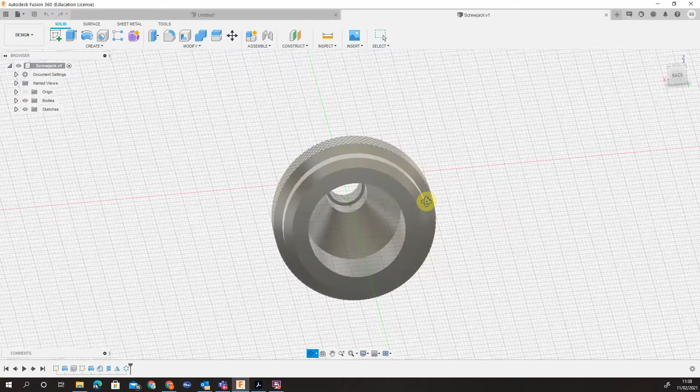Hello everyone, this is a tutorial on how to make a Screwjack body as part of our Screwjack assembly. This tutorial will show you how to use the Revolve command and look at different features we can include, such as internal features, threads, and how to create a nice diamond knurl, which you would have physically for 3D printing or physical rendering effect. So let's get to it.

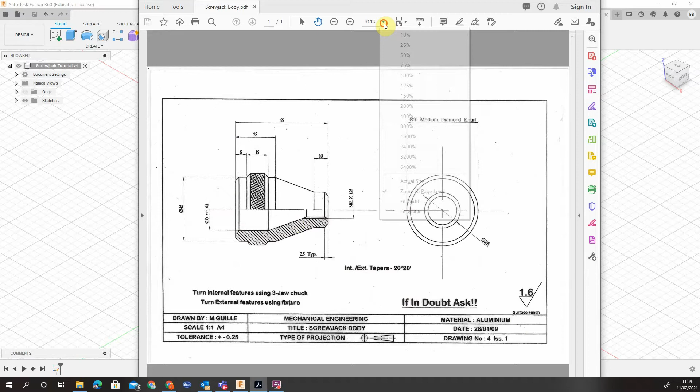A couple of features to point out: it's 50 mil in diameter externally, 65 mil long, and it also has a 30 mil internal diameter with tapers that are 20 degrees. So let's zoom into this particular part here.

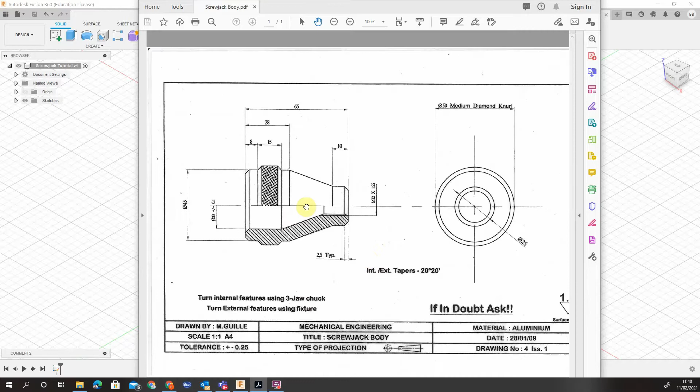This particular drawing is very much different. This half above is what we class as the external view, and this half below is the internal view. So essentially you can see the external features and the internal features on the same element of the drawing - it's a half split drawing. A medium knurl is indicated on the external edge as well.

So let's start making our screwjack. I'm within the workspace - all I've done is save at this point. Obviously I need to draw within my Fusion, so as I said, we're going to use the Revolve tool to do this. Essentially we're going to draw half of our profile and revolve it around a center axis.

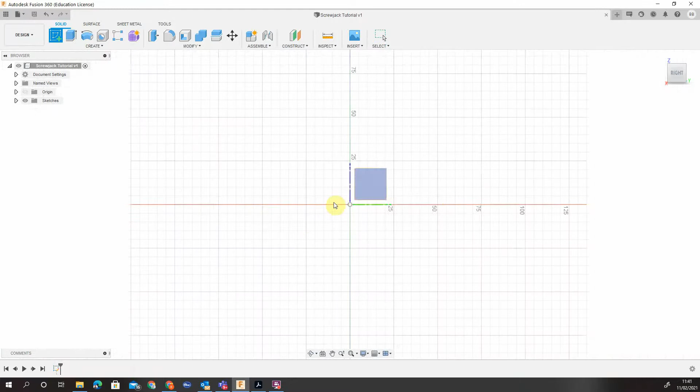To make this nice and straightforward, I want the front of my piece to be on the front here, looking at this section, and I want this to be the left-hand edge as well. So for top, front, right, we're going to draw on our right plane to make it straightforward. Since it's only 65 long and 50 high, let's get a nice view here so you can see your image clearly.

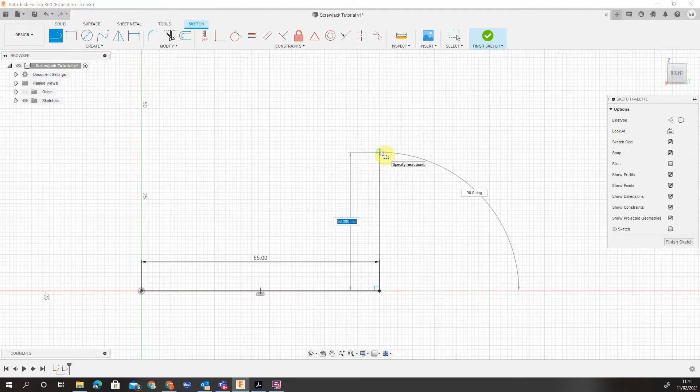First off, I'm going to draw my line 65 mil, and I know it's got to be 50 high. Since we're only going to revolve this around the center point, I need to draw half of the axis, so it's going to be 25 high - just to stay in that perspective and get a nice clear starting point.

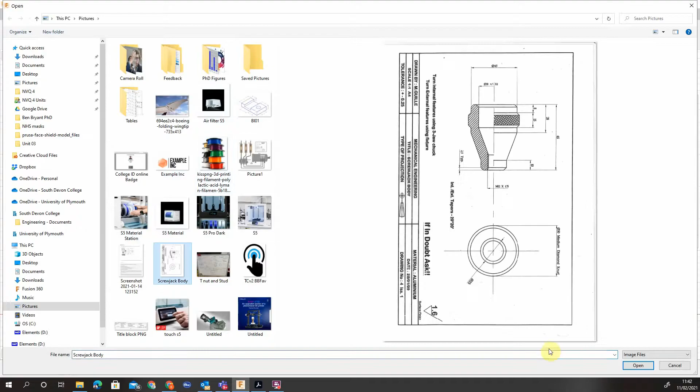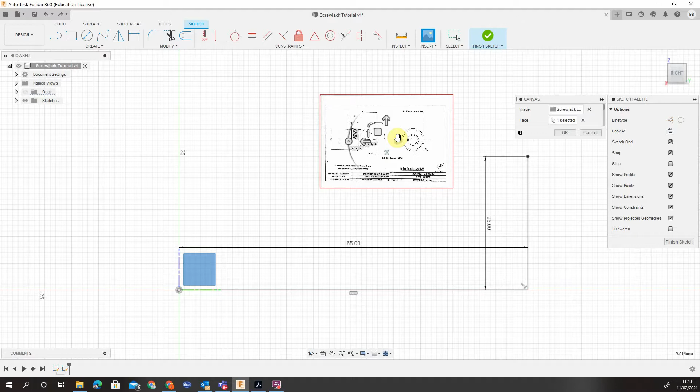Okay, I'm just going to insert my canvas - this will stop me from moving screens the whole time. Manipulate, move that, go slightly above. From here I just need to rotate it around. Hopefully a bit bigger, just so I can see it as a kind of shape. I'm going to zoom out a bit, move everything over, pop this about there, because that's going to be the length I'm looking at.

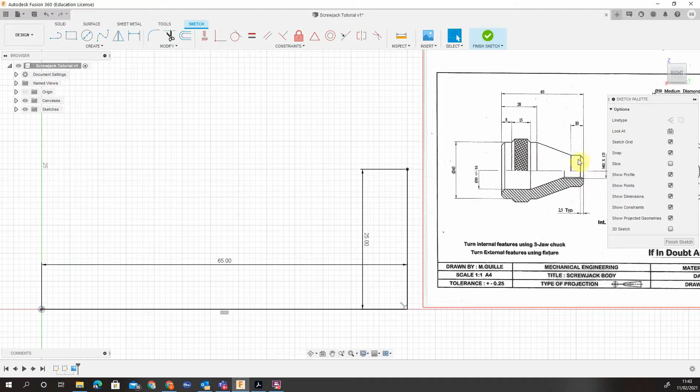Okay, so what we're going to do is we can see our features here: 65 long, 45 high, 50 on the external limit, and then we've got our features. We're going to put this 10 mil this side here, so we know this feature here is 25 - just move that one, it's demonstrated just down here.

25 there. First of all, I'm going to start with this bottom left-hand edge, so 12.5 high, and then we're coming in 10 mil. That's all I can do on that side because I don't know this length yet. Next, I'm just going to tweak this to actually 22.5 - that'll be my starting edge at 45 degrees. I need to come in 8.

And then come up using the L hotkey, coming up further 2.5. Hotkey again L, coming out further 15. L coming again, down about 2.5, coming out a distance, which I don't know yet.

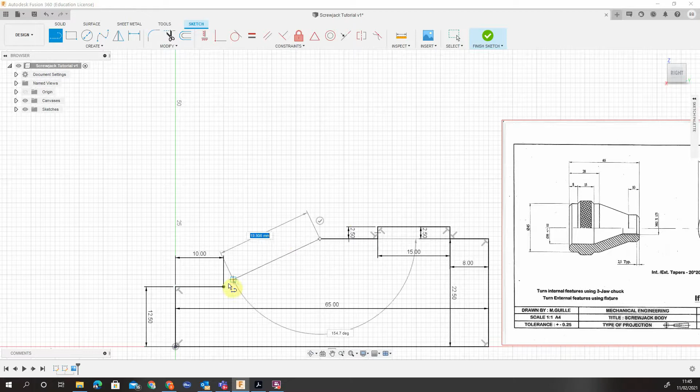And then hopefully going to drop down the angle to get the angle correct. We're going to do the angle in a second. So I'm just going to exit that one. I'm going to run my measurements. I know it's 28 from there to there. So 28, getting everything nice and linked up.

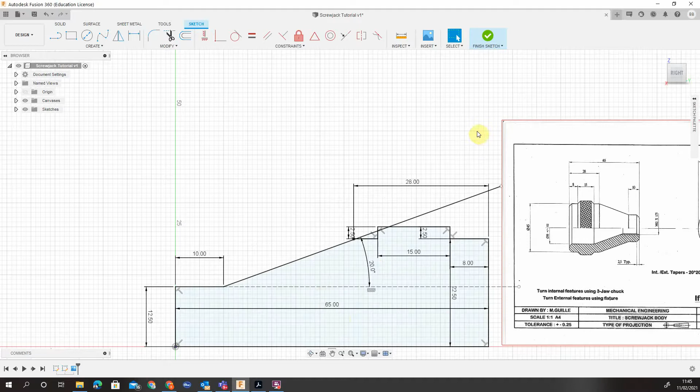Now what I'm going to do is do a tangent line run off of my 10. I know it's 20 degrees. Enter, that's obviously matched the 2. I'm just going to trim

out these components here, get my feature. So that's basically my feature there. I come and just check a couple of dimensions, make sure everything is okay.

So I'm just going to remove the 2.5 here and here because we don't technically know it's 2.5, but we have to presume. So actually, we do know from there to there is actually 50, but that's 25 millimeters, just to make it as accurate as we can.

This one here, again, we don't know the dimension, but we know it's 28. So that is actually reference 15. I think it's fine, 45 high, 2.5. And that's so. Now at this point, we can revolve the whole feature.

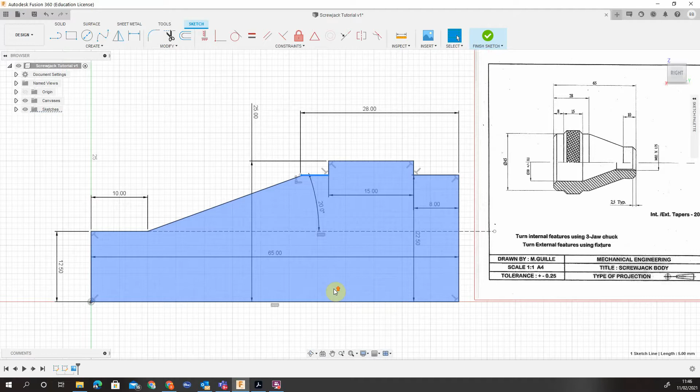We can actually include the internal detail as well if we wanted. So you can just revolve it, leaving the internal features. So I'm just going to populate the internal features now.

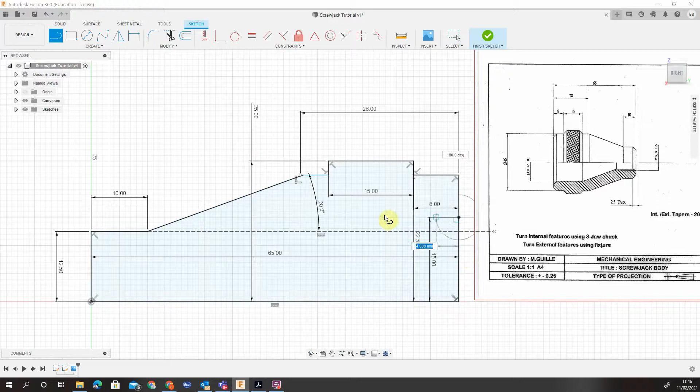So from a center line, again, okay, we're coming up 15 millimeters. So I'm just going to populate 15. Coming along. So I've got 8 plus 15, just using the system's advantage here. 23. And this is where I go into this steep kind of

20-degree element again. So I'm just going to do another line, run it down. Hopefully parallel maybe. So just make it bigger than what you need, so you can trim it off afterwards, make it look fine.

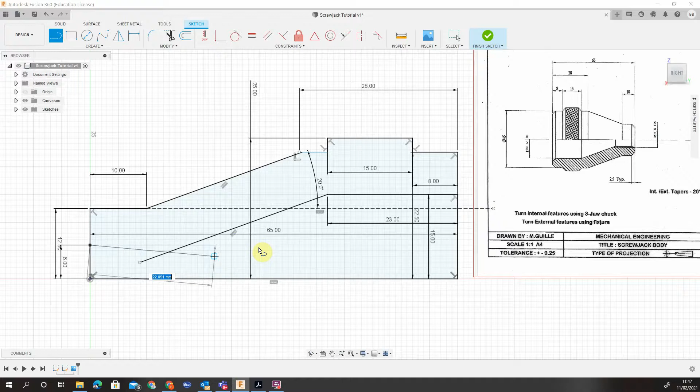This time we've got an M12, so we know the hole's from 12 mil. So again, just run up 6. And run it straight past and trim out the 2.

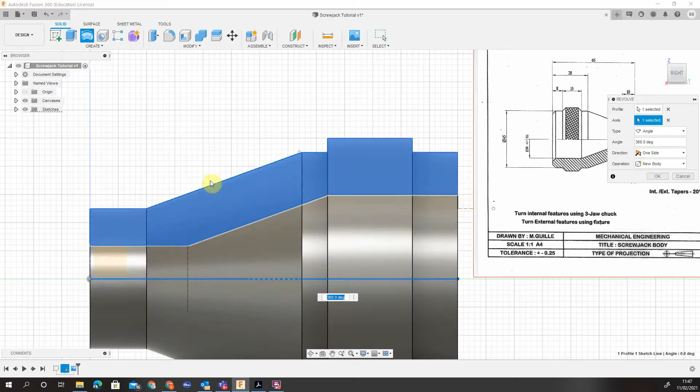Okay, so essentially this is what my profile now looks like. I'm going to leave that line in down the bottom, because obviously that's what all the dimensions are running off. But now when I go into solid, I can do a revolve, choose my profile, choose my axis, and I've got my internal and external shape.

I'm just going to hide that image. Now when I rotate it around, I've got my 12 mil hole. I've also got, when I flip it around the side here, I've got my internal features already inside. It's just a nicer way to do one big sketch together.

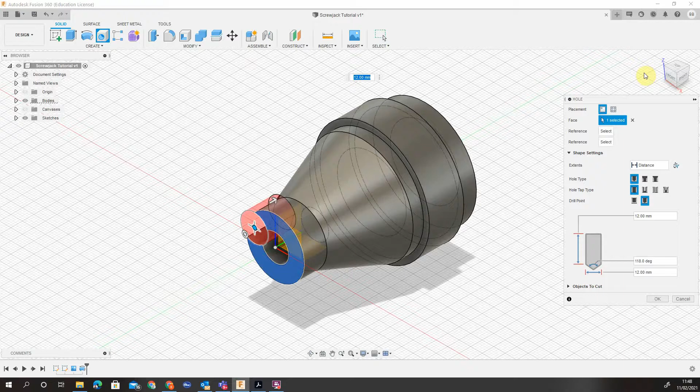So next up, what we're going to do is just make sure that that is actually a tapped hole rather than just a hole at 12 mil. So what I'm going to do is just draw a hole in its face, come round to the front view, pick my reference as the center point.

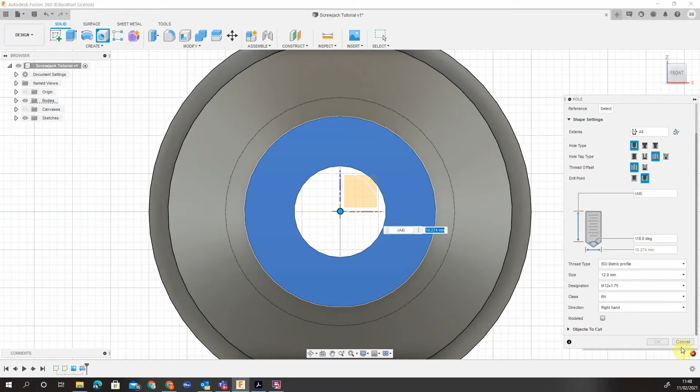Okay, now it's actually not picking up any kind of reference because I have actually already made the hole. So it won't actually let you put a tapped hole through. So if we just put through because it essentially has nothing to cut, you can't actually use the hole feature here. What you can do instead is come down and use the thread feature.

So I've seen quite a few people on the forums have problems with this. They make a hole, forget it's tapped, and you go, oh, you need to go and change it. Actually, if you just come in and make that a threaded hole, it picks up the size and you just okay it. So you can use that technique, which you can't actually use in stuff like SolidWorks as easy as using Fusion. So it's always a good top tip there.

That's my threading, I've got my internals, 20 degrees. Now what I need to do is put on my chamfers. So go into modify, into my chamfers. Okay, now the chamfers here are all 2.5 type, equal distance.

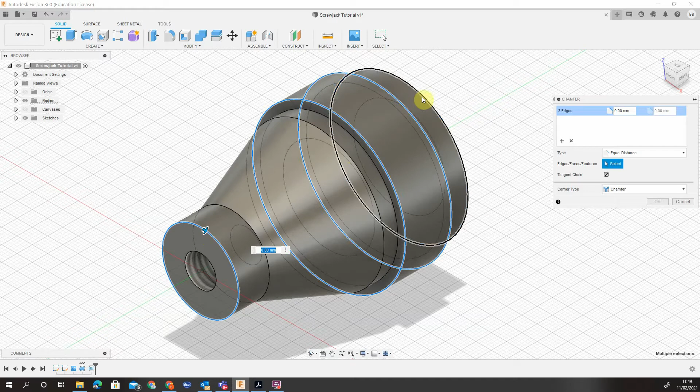There's 4 of them. So what I'm going to do, come in, select this one, this one, this one, and this one. Now if you just double check, there's actually a chamfer on that back side as well. So I'm just going to spin this round and just choose that back feature face.

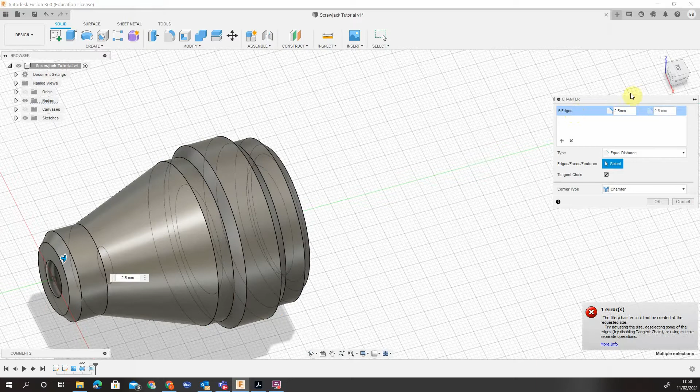Like so, so you have 5 edges, and then quite simply 2.5 mil. Okay, and then hit enter. Add the error there because I put 2.5 meters, and there's our shape.

Now, what you can see on Fusion is actually you can see the internals here because I've got an internal feature. You can actually turn it off using display settings, visual, and either just using shaded, or you can come in and choose shaded with visible edges only. So you're just not getting that internal overlap as much.

So what's left is that technically this is now fit for purpose. I can take this into a drawing and be fine. What I could do is just indicate here that it is a medium knurl, exactly the same as what's on my drawing here. Essentially, it's just indicated there.

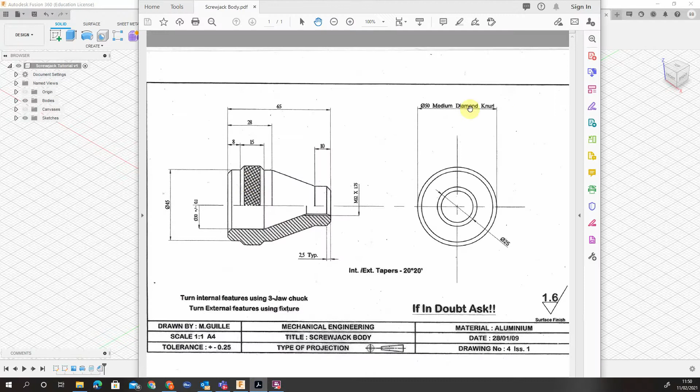However, if you're doing 3D printing or you want some rendering prototype, you actually need to put this feature in here. So this is quite a good technique on how to put in a feature.

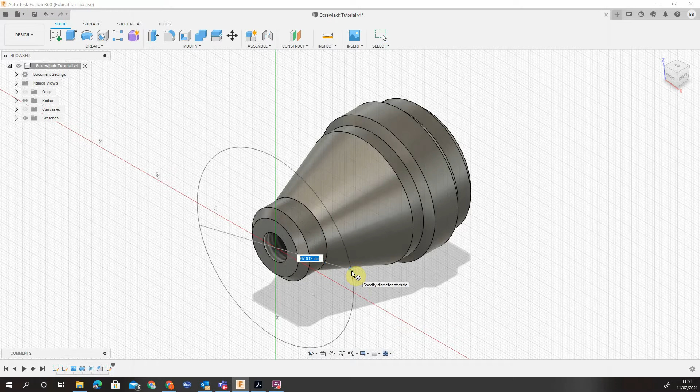So if you put a coil, you run the coil on the front face. You put the center point as the middle. We need to draw it as the largest diameter that we have, which we know is 50 millimeters. It'll put a nice coil through.

So I don't want a whole continuous rotation, I just want to use a factor of it. So I'm just going to use 25% of that rotation.

My circular, I want to use triangle internal. The height, I'm going to leave the same for a second, but I might actually change it to 65 just to get the full width. I'm just going to spin around to the right view and see what I can see here. So it is intersecting quite nicely there.

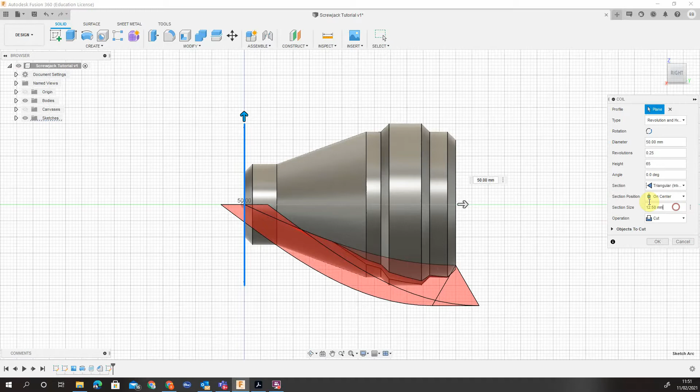Section size, I just want 1 mil. You may or may not be able to see, but if you look on the front view, this isn't actually touching my shape until it intersects with the top of my chamfer up here. And it only cuts the top element of that part. It doesn't touch any other elements of that shape, which is important.

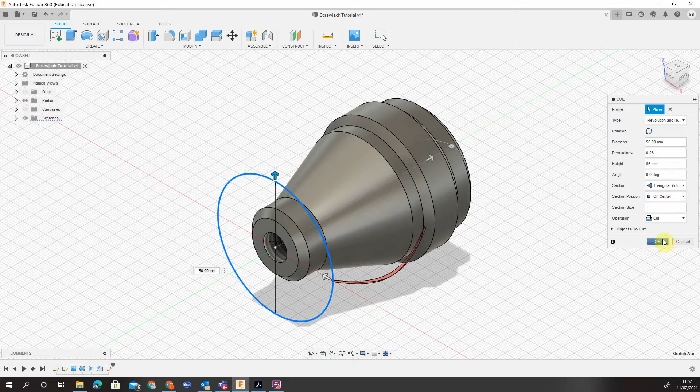If you're smaller, you'd be cutting into more of the shape. So 25% of the revolution, 65 which is the height - essentially its height moving down the screwjack - internal triangular. What it's done is put a nice little cut for me at the bottom of my feature there.

So next thing I just need to do is mirror that. I'm going to mirror it on features, choose my feature down the bottom, choose the feature coil. I'm just going to mirror. Rather than click on the faces here, I find it easy just to go to the origin, and I'm going to choose the XY plane.

So just populate it sort of roughly halfway above. Okay, that one. So now I have a mark on the top and a mark on the bottom. They're not actually in the center, but it doesn't matter at this stage because what we're now going to do is pattern that.

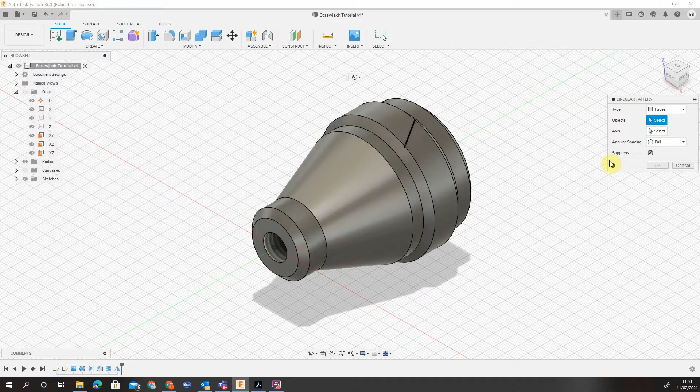So I'm going to create pattern, circular pattern. Again, just change the features. Make sure you choose the coil and your mirror, so you get both halves. Axis, you can just choose any basically circle you want really, but I like to pick a cylinder because if the cylinder ever changes, it's effectively the same.

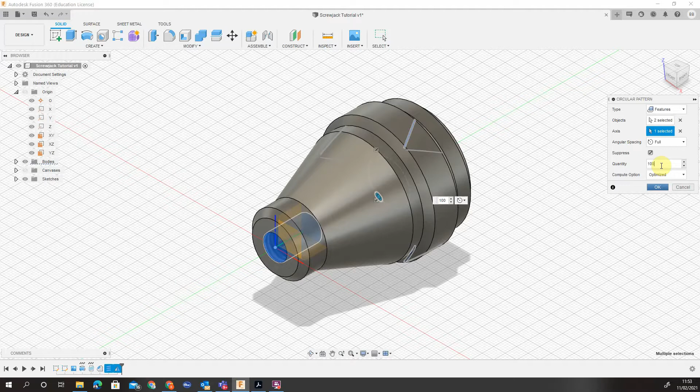Now, I would choose optimize for this before you punch in the quantity because it's going to use quite a lot of power. Because what we're going to do is put in 100 of these, which will then make that nice crisscross pattern you can now see. And if you use adjust or identical - adjust makes potentially different copies of the pattern, this includes more features, we're just using this for visual interpretation. Identical is basically replicating identical features. So we just need optimized here.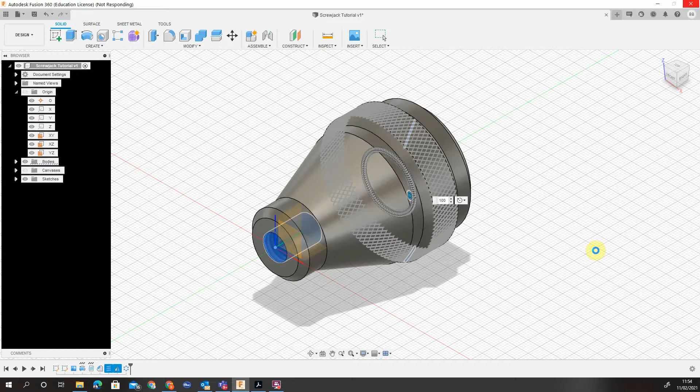Let it compute the best way to put this on, then hit the OK button. And a little bar will pop up in a second down in this corner here. It will just process that you're putting on a secondary kind of feature that's using some power. So be patient at this stage, because if you start clicking and thinking, why is it not responding, it will crash your computer. It's just got a link into the server, so just give it a bit more power.

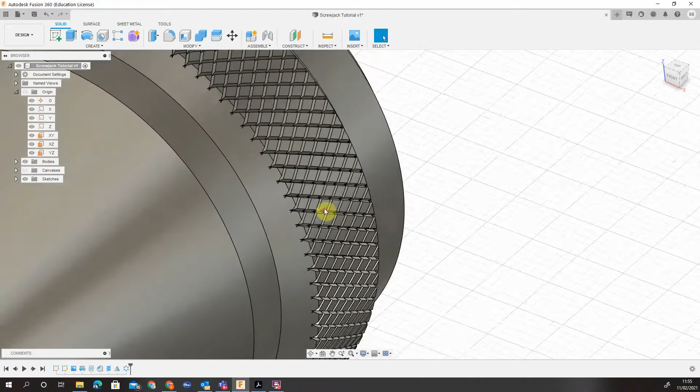That took about roughly a minute. So now you can see that when I zoom in, I've got this nice diamond knurl. Now because I've got a chamfer on, it does unfortunately cut into the chamfer. But if you don't do the chamfer first, you have to pick up all these little individual faces. So actually, when you machine this in real life, you would put the chamfer on after you've done the knurl because it makes a nice tidy feature.

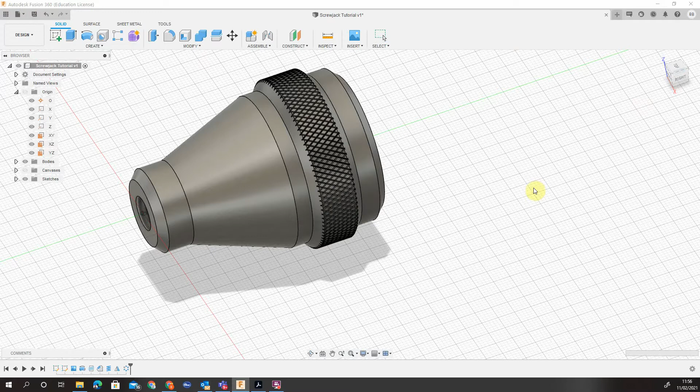However, Fusion doesn't like it, and trying to go around and doing all the edges of both would just be a nightmare. So for me, I'm happy with that little bit of an overlap, and actually it replicates what you see in real life. You wouldn't remove all of the knurl anyway at this stage, but make sure you save your update. So you can just use a save.

Okay, and that is your Screwjack feature all ready to go. The next stage is you could just output it to a drawing.

So just going to use the drawing workspace now, which will just bring it in. Again, because we've oriented this properly, front is the front, right hand side we did a lot of the modeling on, and the top feature will then appear in the correct location as well.

Once again, just be patient at this stage. Sometimes it can take a couple of seconds just to load in and pull everything through your internet connection, or if you're like me, you've got quite a lot of software on your laptop.

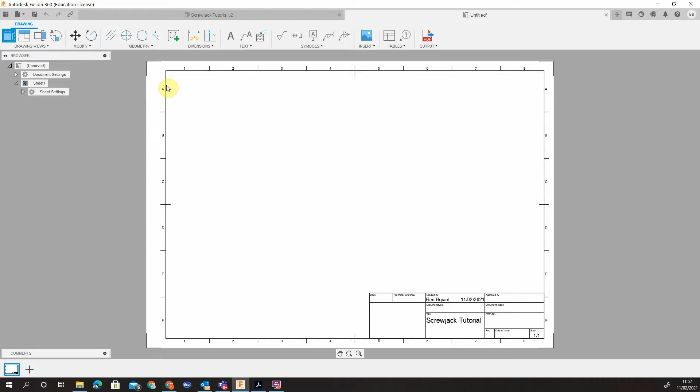Okay, so it's all loaded up now. It's brought in my first view. So essentially this is my front view, and it will project off one side. I can actually, if I wanted to, change that and put maybe the back if I want to see on the back first. But it is important to see whatever orientation that you want. So I can put my front view first.

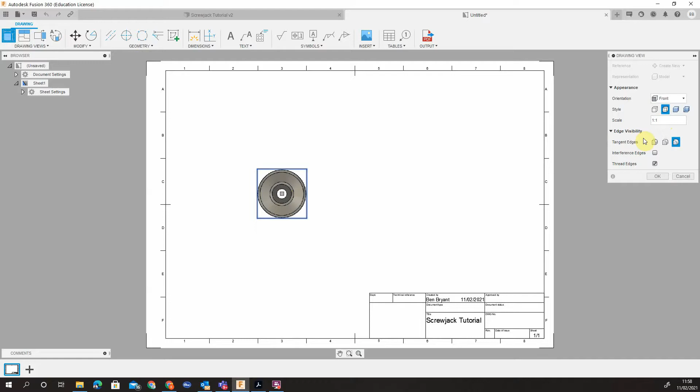I could put scale in, so I wanted it slightly bigger. So I could use like 2:1 if I wanted to. So actually, I'm going to do that, make it a bit bigger. 2:1, and then again, you can show different features.

Threads if you want to show threads as well, and then you've got the shaded option, or shaded with hidden edges, or you've just got visible with hidden edges. So it's kind of important to show whatever you think is necessary at this stage. So for all intents and purposes, because it's quite a lot of hidden detail, you should put visible edges only.

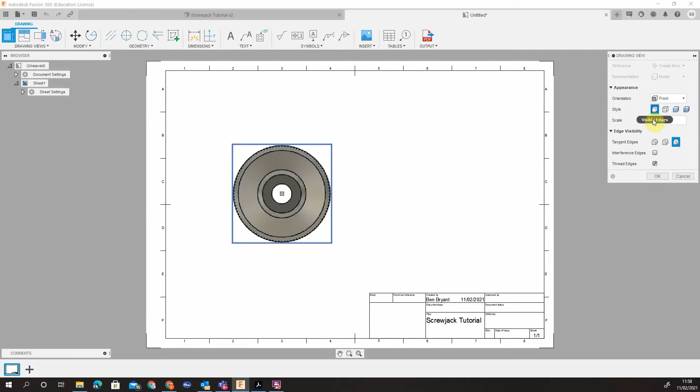What I do is now just show the external features only, none of the internals. Okay, so it's got my thread showing, I've got my external edges. And remember, guys, because it's got a lot of minor features with the knurl, it will take a fair amount of time to process. So don't worry if it is taking a long time.

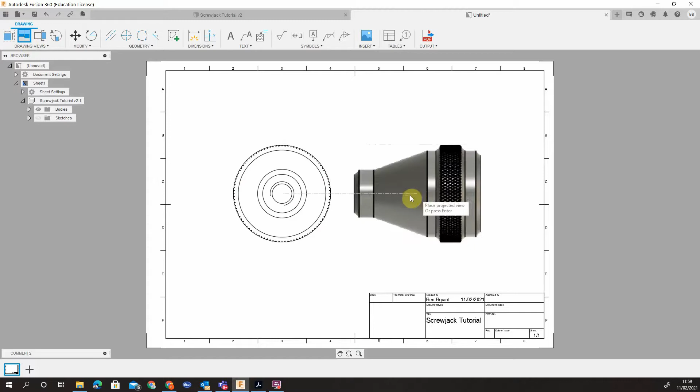Next, I'm just going to project off to the right hand side to confirm. Again, a lot of the processing is going to be this knurl, which is why a lot of people in the industry, just for effectiveness, they won't include that knurl. But as we know, for design purposes, it does look kind of cool. So it's sometimes important to use.

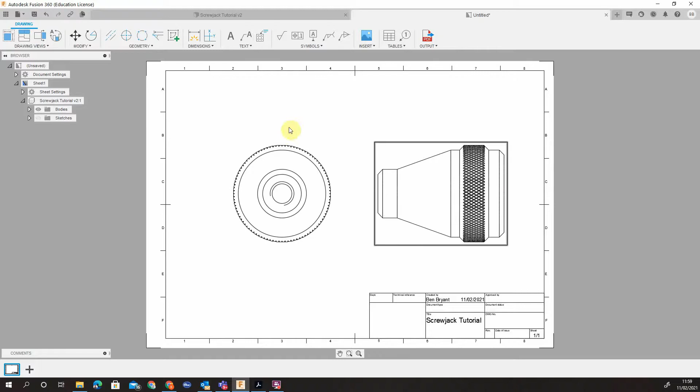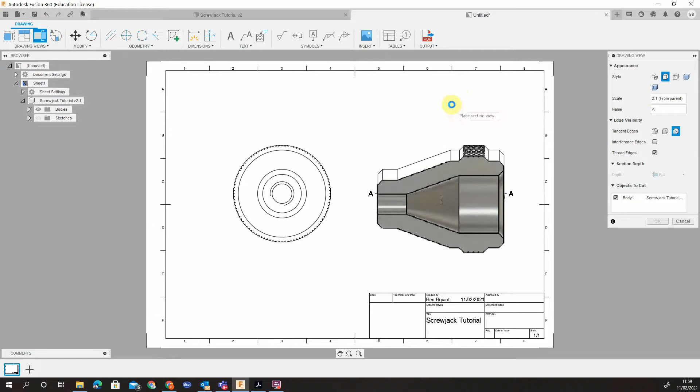So what I'm going to do now is just use the section view, which is my parent view, which is going to be that one, and I'm just going to do a half. You could do a half split, I suppose, rather than a section, but you could actually just do a section view. You can say I'm going from there to there, and project up or down, depending on what you sort of want. So you could put a nice projection view further up as well. Pop that there.

And what I'm doing is just going to drop my other two drawings down so they don't overlap, like so. So I've got my section there and there, and again, it shows the internal view.

The other view you could do is you could actually put a break point through, so you could come in and make a break section view. So you could do like a half view. Again, so if you're coming in, just come in and do a there to there to there view, like so. So you're literally just drawing a broken out cut view, like so.

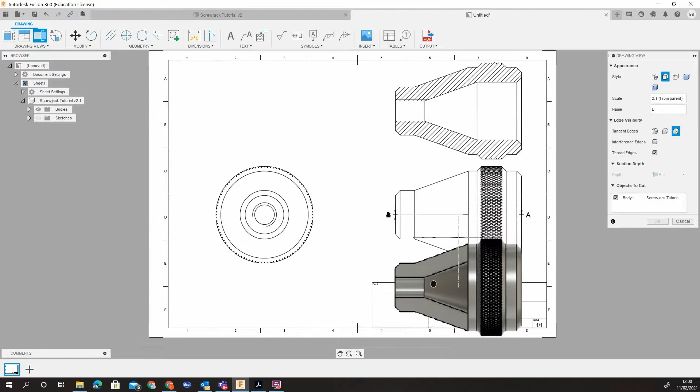Let me, when it loads, pop that one there. I know it's not out of shape, but just quickly processing. So yeah, it'll show you then the internal view as well, but I kind of don't really want that, so I'm just going to get rid of it, and then I could actually just trim out and only look at half, but because it's got quite a lot of important detail, I kind of want to include it really.

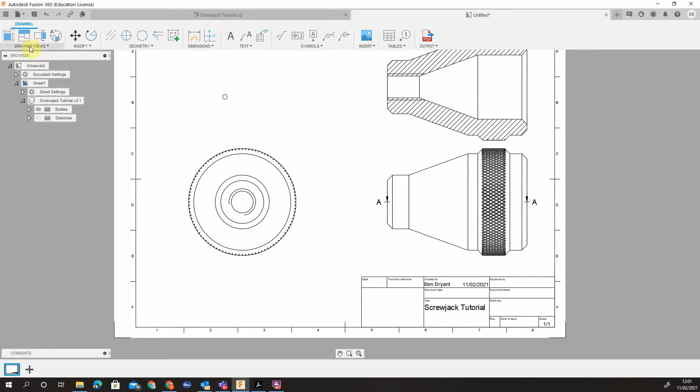So next stage is then just to start essentially running your dimensions really. So let's have a look at populating some dimensions. I can use the D tab now, again because we've used the actual knurl, this can be quite tricky to get the correct points. Just make sure you're zooming in.

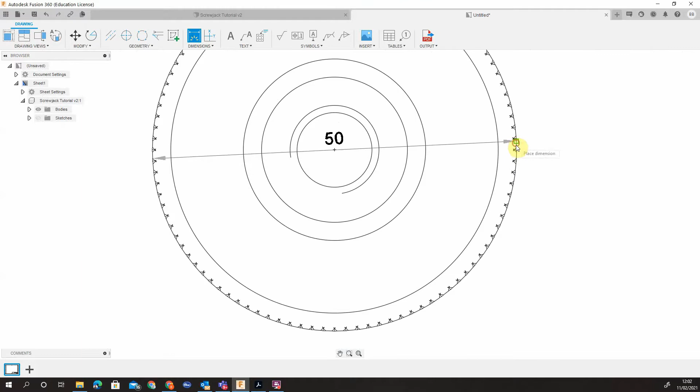It should be 50, so I'm going to get a lot of 49s here, like so.

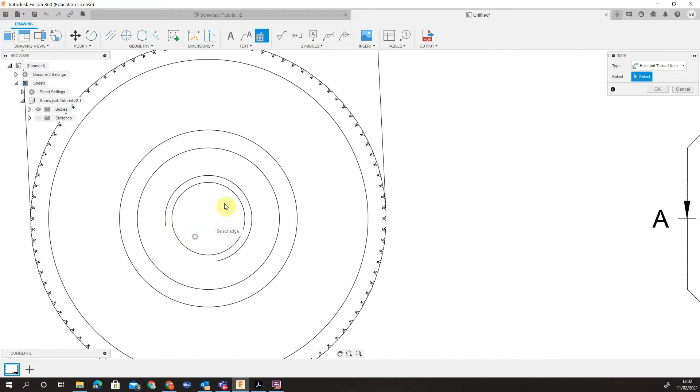Maybe you can stuff like a hole call out, so you could call out the thread. You could put notes on as well, so you can kind of justifiably look at different components as well.

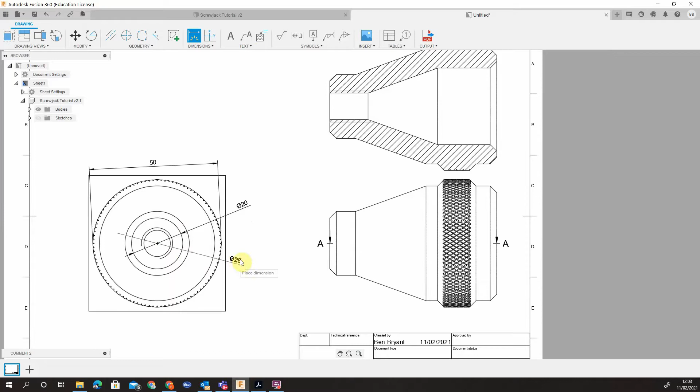Pick up its diameter 20, make sure it's coming out nice and clear. And the second one is diameter 28. So you can come in again.

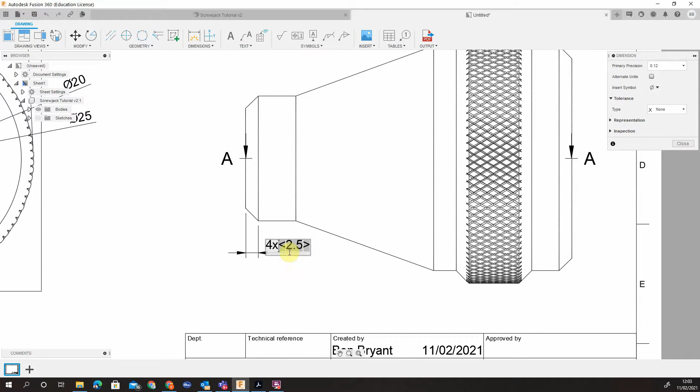Bring your 2.5 radius. Now what I like to do is just sort of tweak that, so you could just put it's actually 4 times. You can double click in and just put 4 times 2.5, so just know that all those chamfers are all exactly the same.

Again, you can come into the dimensions tab and get the angular dimensions from there to there, which can overlap and look a bit messy. So hence why on the other one it was written rather than physically shown, but essentially down here would be quite a nice way to show it. 20 degrees, come in again.

So pick up point to point, 10. There to there is you actually know that one before, so there to there was 8.

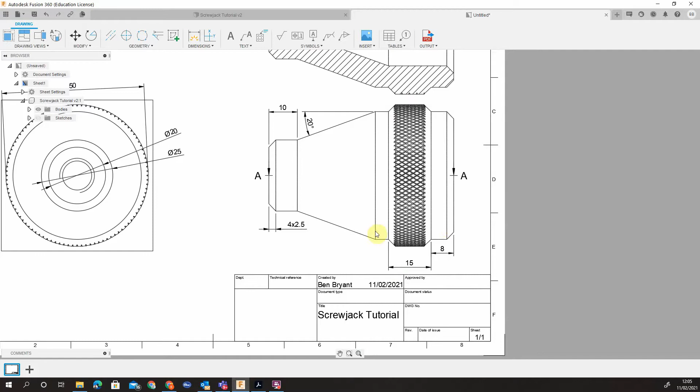Just picked up as well, actually my drawing is slightly wrong there, so it should be 28, not 27.53. So I'm just going to reduce the scale down on this one as well.

Scale factor, so I just half scale it. I'm just going to change the scale down to 1 to 1.

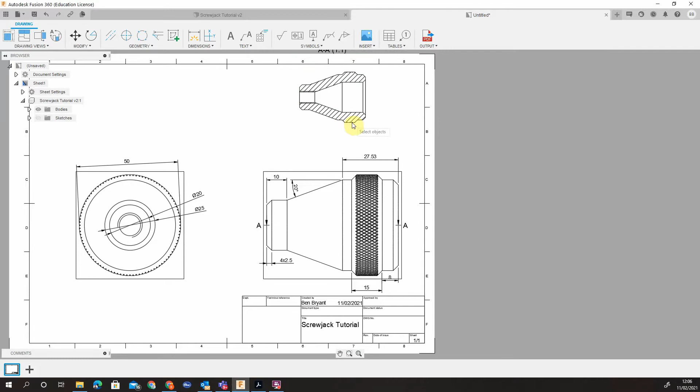Just to make it a bit more clearer. So now I picked up that point, so I'm just going to go straight back into my sketch here. I'm going to see what essentially went wrong.

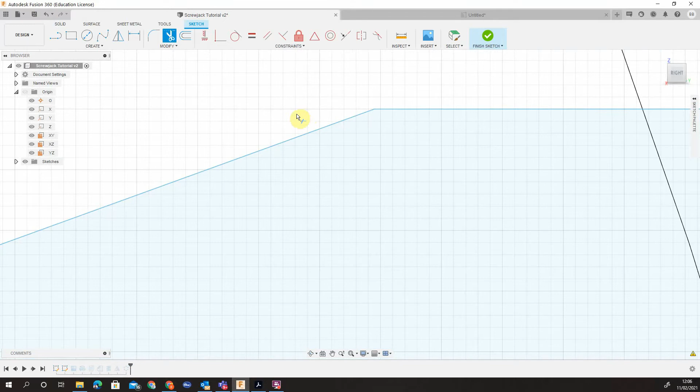Because it is actually 28. What I didn't realize there is that I actually picked the point that didn't exist.

So if I now go from there to here, now I get a 27. So now I'll change it to 28. Just tweak everything for me.

Now that to reprocess, and then we go back to the drawing, update the drawing, which is why I like using Fusion, because it has automatic updates, which keeps everything nice and concise.

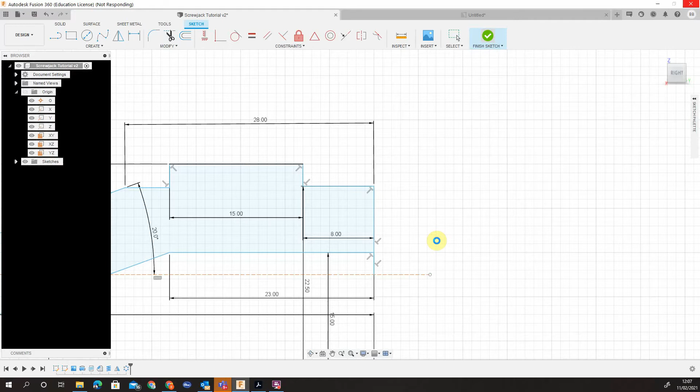Okay, so let's now process that. Going back to my drawing, it will now bring up here that something's out of date.

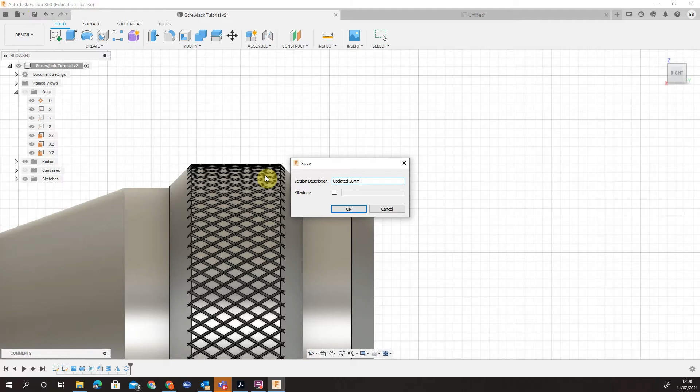So I'm just going to save it and just put updated, 28 mil. Good to put a description, so if you ever do come back, you know what the changes were.

Now it's saying it isn't referenced. If you now look at 27.53, I'm going to click this one, re-reference to the other drawing. It's updated.

It's now the latest version. And once it's processed it, that 27.53 will change to 28.

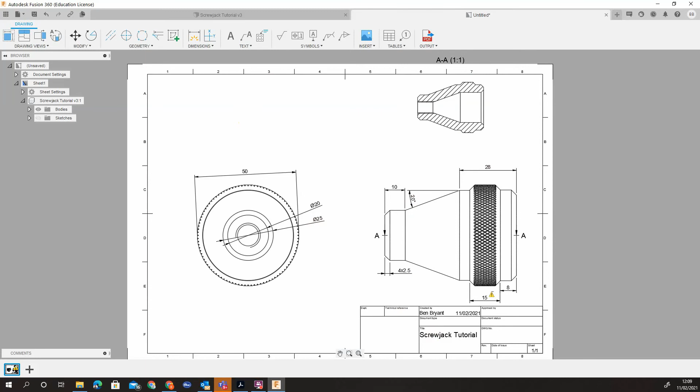Like so, so there it is within the 28. There's also another thing that the 15, it's just picking up, it's no longer associated.

So you just come in, double click as well. It gets reassociated like such. So there we go, so there's a particular component.

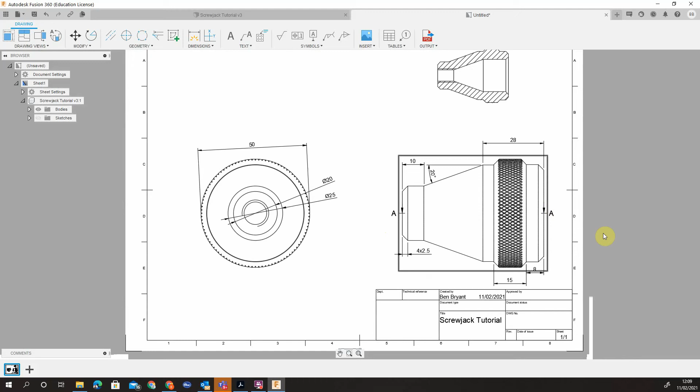Now I can focus on my internal one. So just picked up the AA is actually too high, so let's bring that down.

So that is a completely different scale. Just going to dimension some key components here. So I'll call out, not going to work at this.

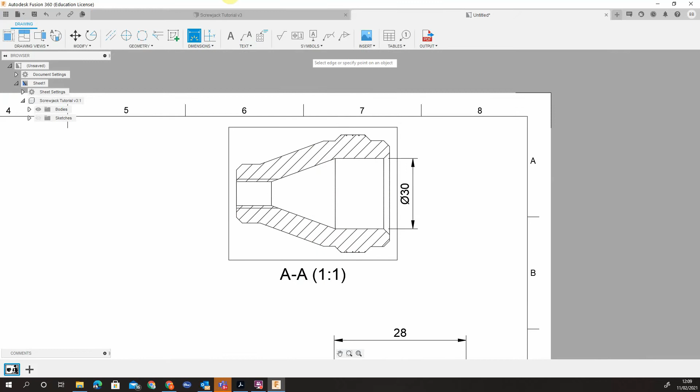There's 30. Put a note in, so that's M12 x 1.75 in there.

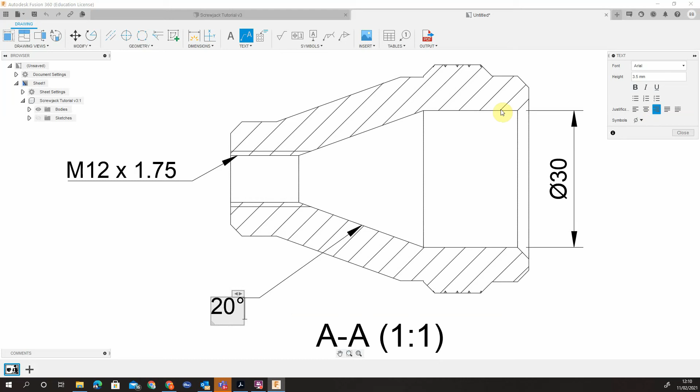Put like 20, the symbols, but 20 degree. Again, just make it nice and clear.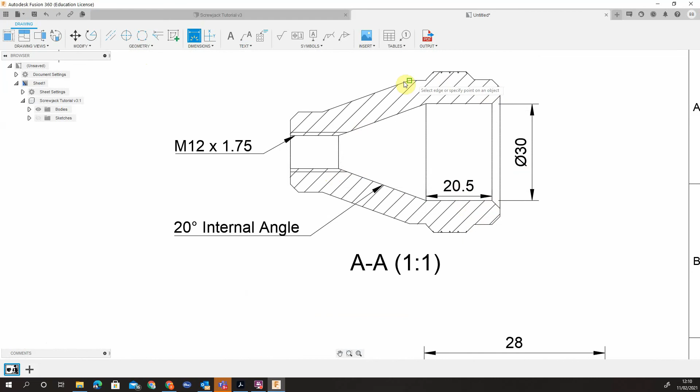Like so, if you want, you could probably put a bit more dimension on than what was on the other one, like so. But again, because it's an internal feature, it's kind of not really going to be the same throughout the whole picture.

So you have to be careful what you're doing. But you do get it's 30 and then obviously 12 on either side, so it isn't necessarily too much.

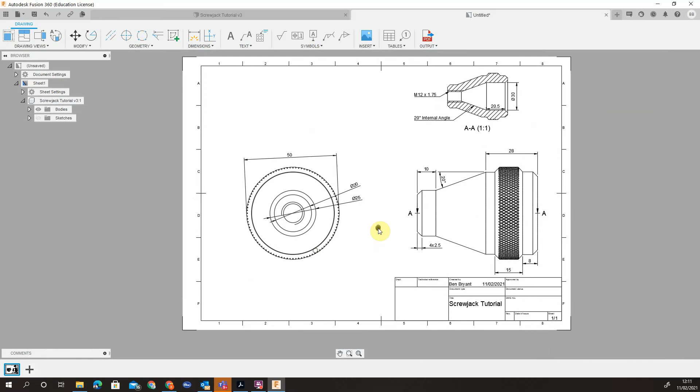So that's it really, so there's my sort of constructed shape. I could save that, populate the title block, and output it to PDF and give it to my machinist to now make.

So just hit the save, screwjack drawing, and that's the process. And that's the process using the Revolve tool.

So you can also do this additively, and you can do it subtractively as well. So I hope you understood the tutorial and it's useful. Thanks for watching.